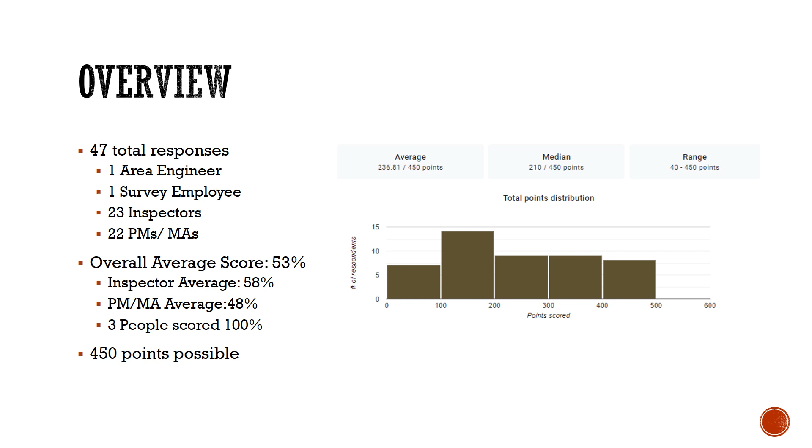The total amount of points available was 450 points. So you can see in this table over to the right that the average was 236.81 out of 450 points. The median was 210, and our range was from 40 points to 450 points. And with that, we'll jump into the first question.

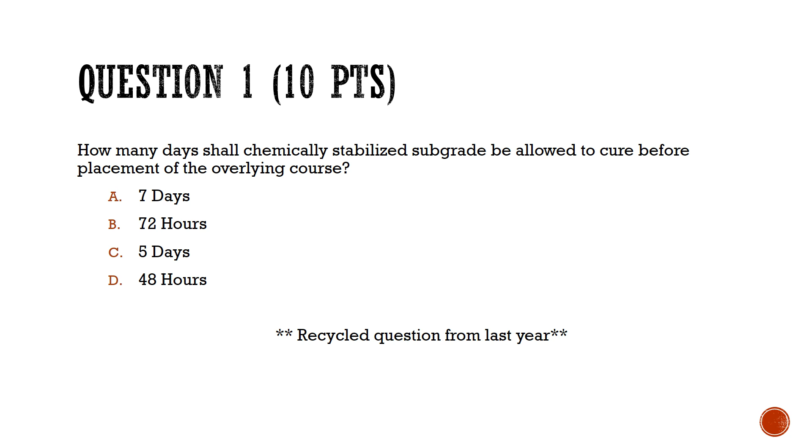Question 1 was worth 10 points. How many days shall chemically stabilized subgrade be allowed to cure before placement of the overlying course? A, 7 days. B, 72 hours. C, 5 days. Or D, 48 hours. This question was recycled from last year, so we're testing a little bit to see if you guys retained any knowledge from last year's Winter School Jeopardy.

The answer to that was C, 5 days, and that came from spec 20605D, curing and construction of chemically stabilized subgrade. You can see I highlighted from the spec, it says cure the chemically stabilized subgrade for at least 5 days before the placement of the overlying course. 27 people answered that question correctly, so that's about 57% of you.

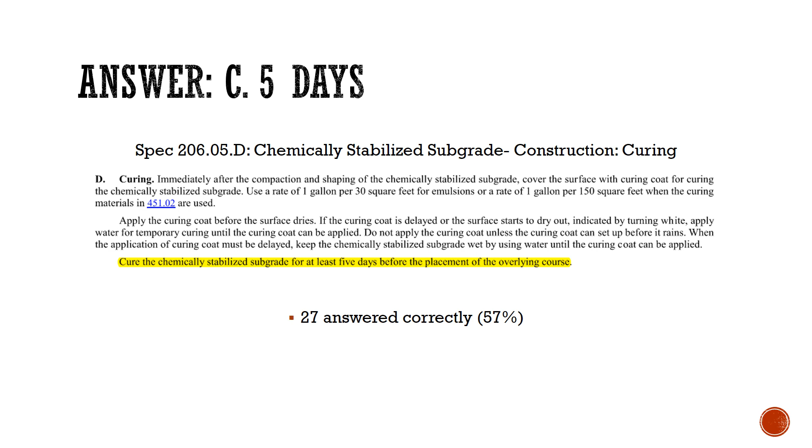Alright, question 2 was worth 20 points. At what temperature will the city measure asphalt binder by the gallon? A, 250 degrees Fahrenheit. B, 300 degrees Fahrenheit. C, 285 degrees Fahrenheit. Or D, 325 degrees Fahrenheit.

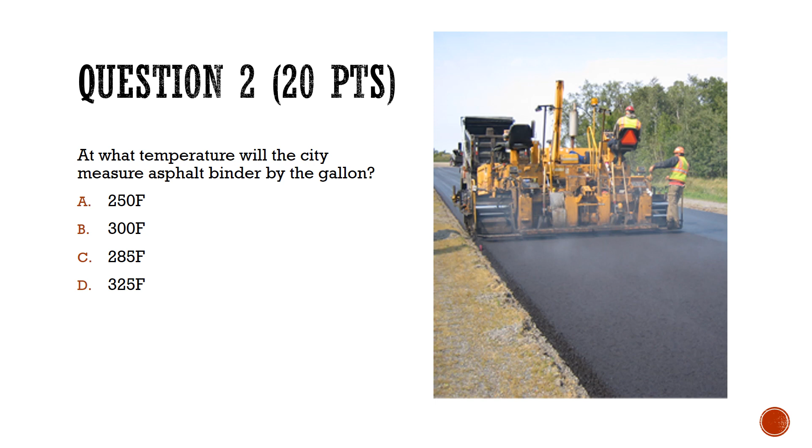The answer to that one was B, 300 degrees Fahrenheit. That answer came from spec 10901, acceptance, measurement, and payment, measurement of quantities. There is a table there in the spec, and it says the city will measure the following materials by the gallon at the following temperatures, and it shows asphalt binder at 300 degrees Fahrenheit. 22 of you answered that correctly, so about 47% got that one right.

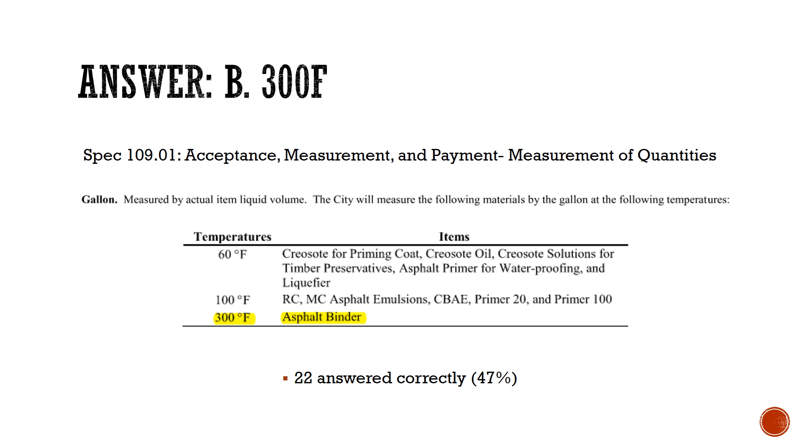Question 3 was worth 10 points. It was a fill in the blank. Embankment material, excluding rock and RPCC, shall be spread in successive horizontal loose lifts not to exceed blank inches.

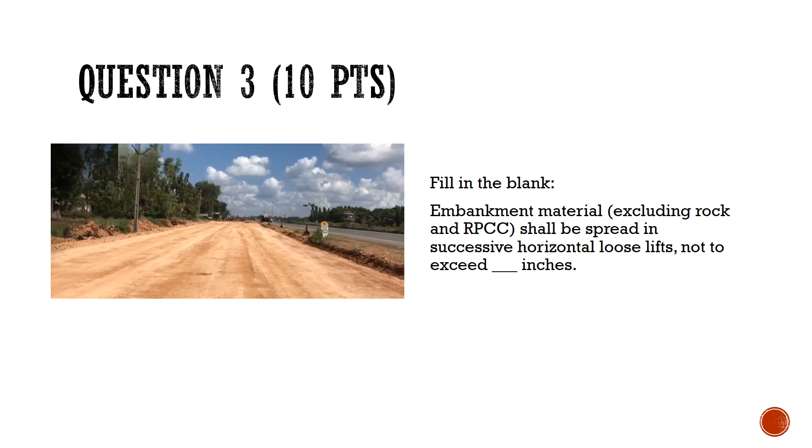The answer to that was 8 inches. That came from spec 20306, roadway excavation and embankment, spreading and compacting. You can see from the spec book right there, it says spread all embankment material except for rock in 20306C and RPCC in 20306D in successive horizontal loose lifts not to exceed 8 inches or 200 millimeters in thickness. 29 of you answered that correctly, so about 62%.

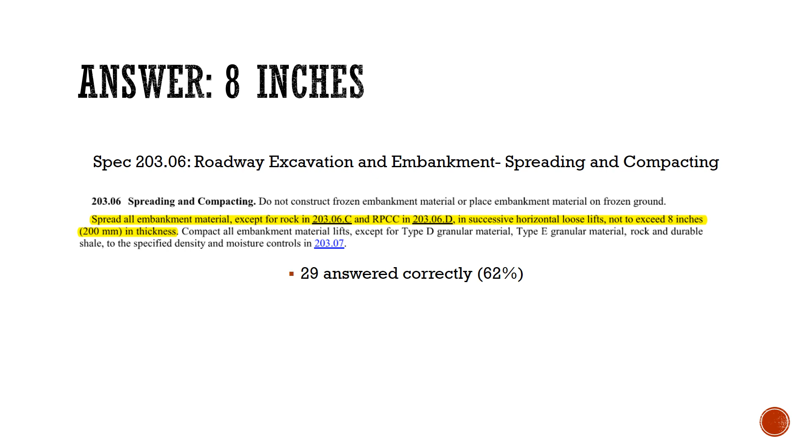Question 4 was worth 10 points. All fiber work that will disrupt system devices or infrastructure shall be limited to the blank weekend of each month, unless specifically permitted in the plans or otherwise directed by the City Fiber Construction Coordinator. A, first. B, second. C, third. Or D, fourth.

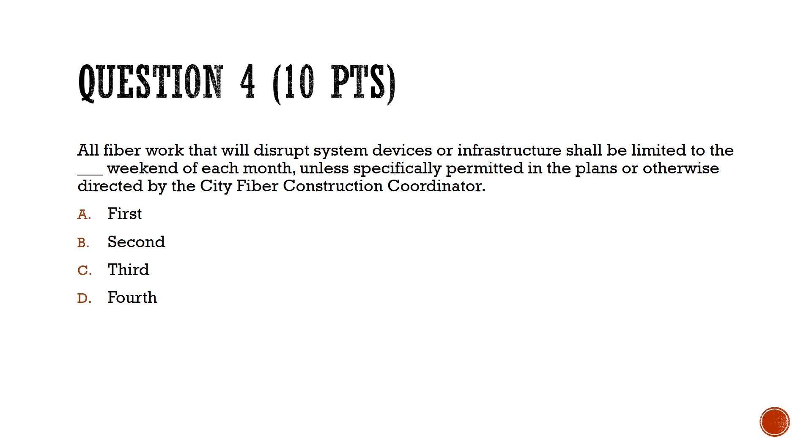The answer to that one was C, the third weekend of the month. That came from Supplemental Specification 1620, Fiber Optic Cable Material, Installation, and Testing Requirements. We pulled directly out of that supplemental spec: all work that will disrupt system devices or infrastructure shall be limited to the third weekend of each month, unless specifically permitted in the plans or otherwise directed by City Fiber Construction Coordinator. The third weekend of the month includes the hours of 9 p.m. Friday through 5 a.m. Monday. 25 of you answered that one correctly, so about 53% of the responses got that one right.

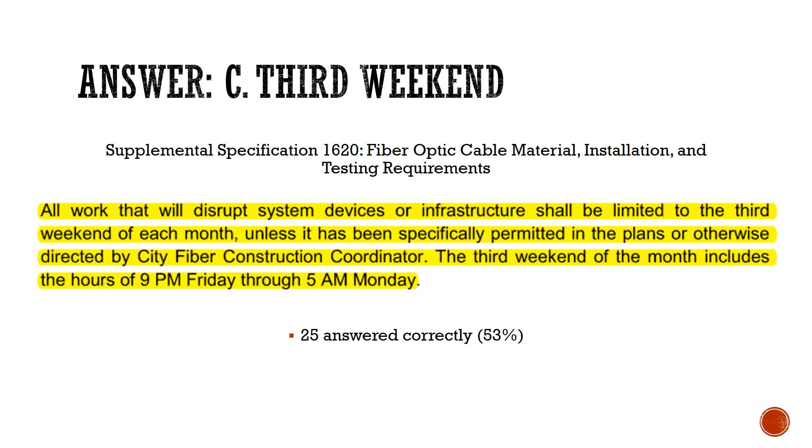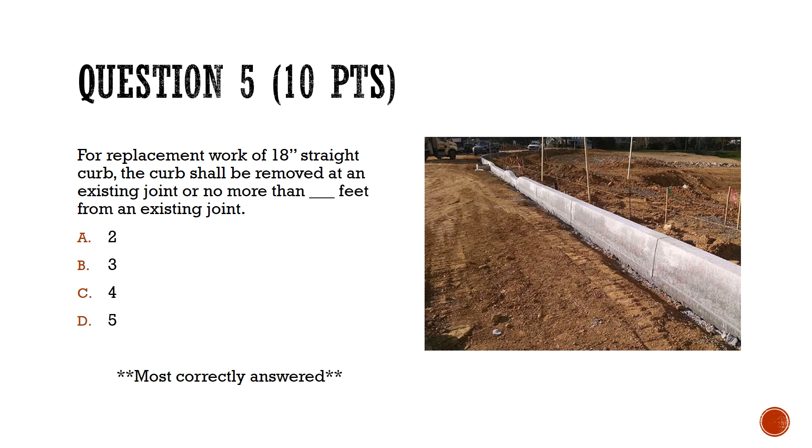The answer was D, 5 feet. That came from Standard Drawing 2000 for 18-inch straight curb. In the notes it says, for replacement work, the curb shall be removed at an existing joint or no closer than 5 feet from an existing joint. 42 of you answered that correctly, about 89%.

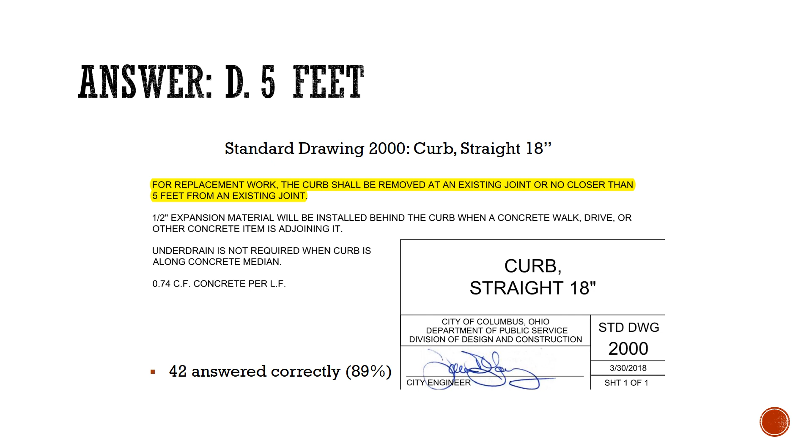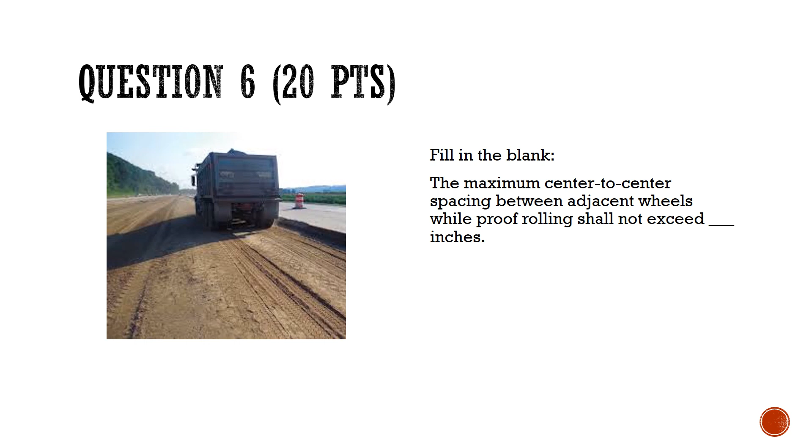Question 6 was worth 20 points. It was a fill in the blank. The maximum center-to-center spacing between adjacent wheels while proof rolling shall not exceed blank inches. The answer was 32 inches, from spec 204.06, subgrade compaction and proof rolling/test rolling. Note number 4 states a maximum center-to-center spacing between adjacent wheels not exceeding 32 inches. 28 of you answered that correctly, and that is 59%.

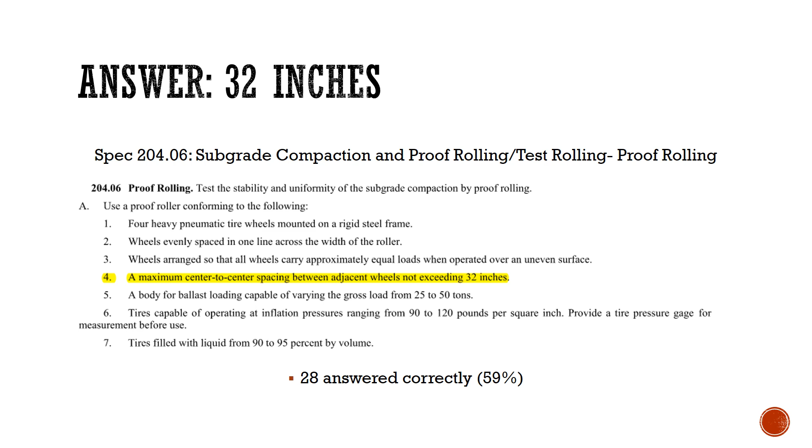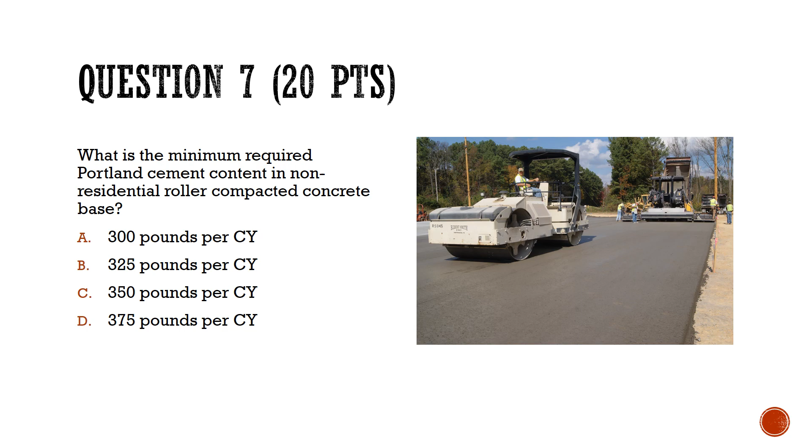The answer was C, 350 pounds per cubic yard. That came from spec 30703, roller compacted concrete base mix design. It says roller compacted concrete base, the minimum Portland cement content shall be 350 pounds per cubic yard. 30 of you answered that correctly, about 64%.

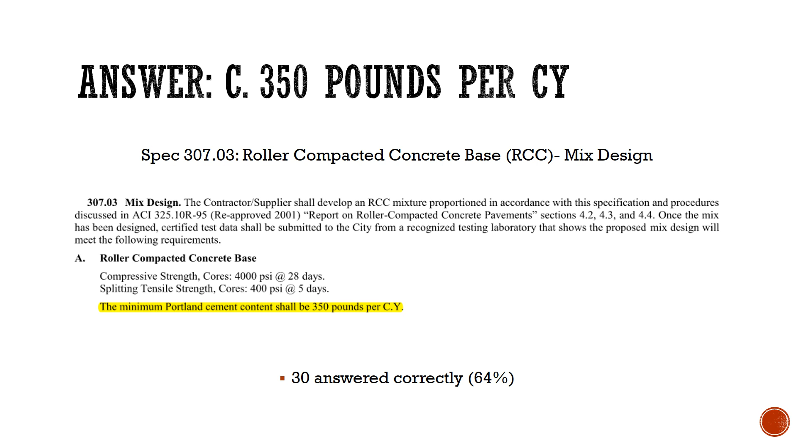Question 8 was worth 30 points. If transporting hot asphalt concrete at prevailing air temperatures below blank degrees Fahrenheit, or if the length of haul exceeds blank miles, truck beds shall be insulated to maintain workable mix temperature. A, 55 degrees Fahrenheit, 25 miles. B, 50 degrees Fahrenheit, 20 miles. C, 55 degrees Fahrenheit, 20 miles, or D, 50 degrees Fahrenheit, 25 miles.

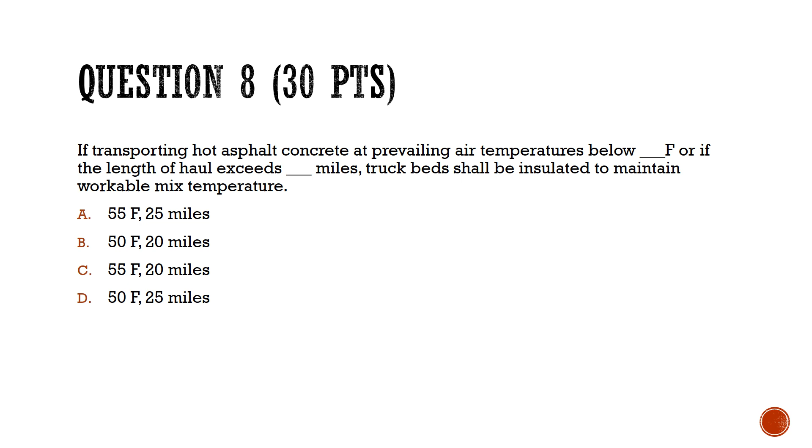The answer was B, 50 degrees Fahrenheit, 20 miles. That came from spec 401.11, asphalt concrete pavements general hauling. It states, if transporting hot asphalt concrete at prevailing air temperatures below 50 degrees Fahrenheit, or if the length of haul exceeds 20 miles, insulate all truck beds to maintain workable mix temperature and ensure that all covers are fastened to exclude the wind. 32 of you answered that correctly, about 68%.

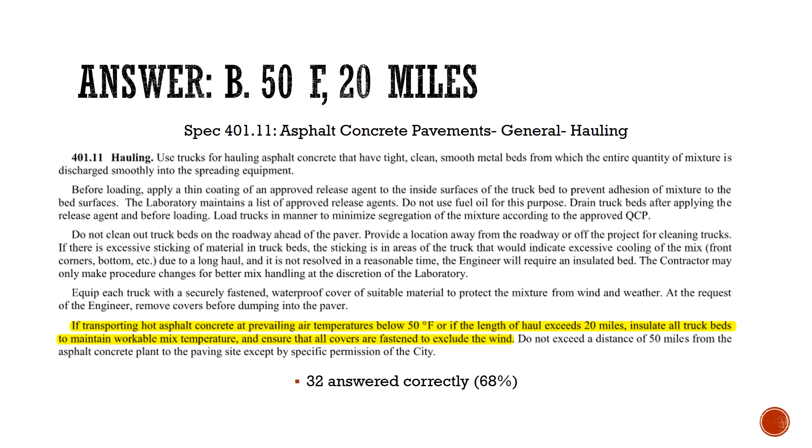Question 9 was worth 20 points. What is the diameter of a typical water curb box lid? A, 4 5/8 inches. B, 4 3/4 inches. C, 4 7/8 inches. Or D, 5 inches.

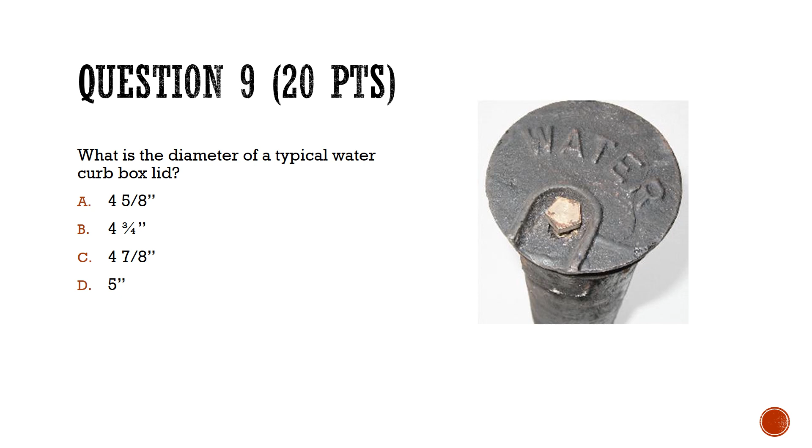The answer was C, 4 7/8 inches. That came from the Water Standard Drawing L1001, which shows that the diameter of the lid would be 4 7/8 inches. 22 of you answered that correctly, so only about 47%.

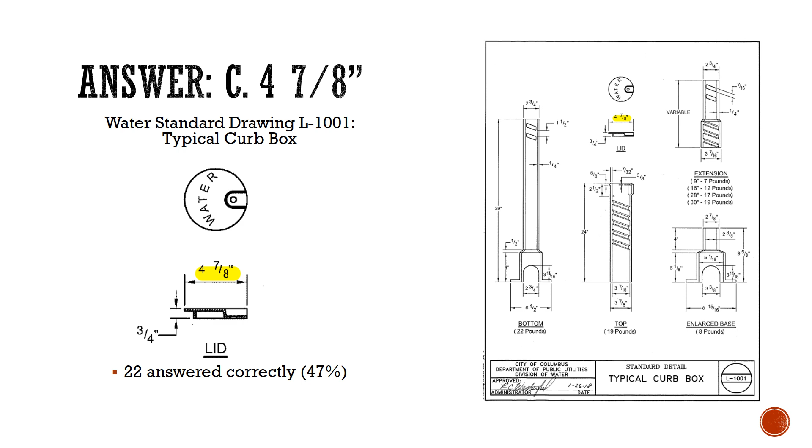Question 10 was worth 30 points. The allowable leakage during a pressure test of 800 feet of 24-inch water line is A, 1.59 gallons per hour, B, 1.99 gallons per hour, C, 1.16 gallons per hour, or D, 1.49 gallons per hour.

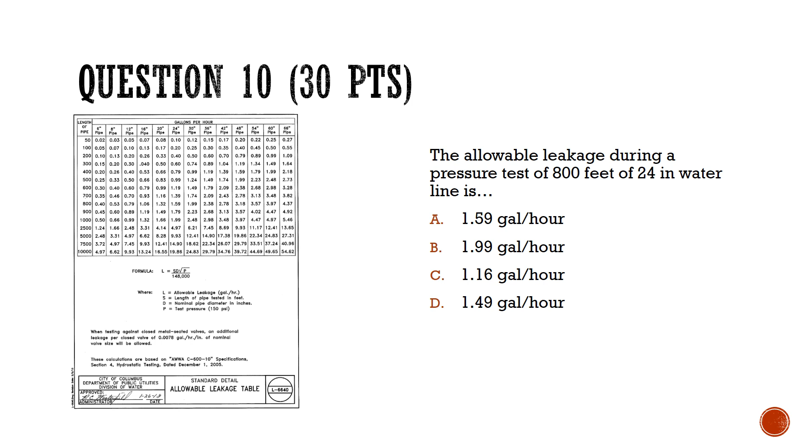The answer is A, 1.59 gallons per hour. To get that answer, you can either use the formula on Standard Drawing L6640, or you could have used the table as highlighted there. 21 of you answered that correctly, so only 45%.

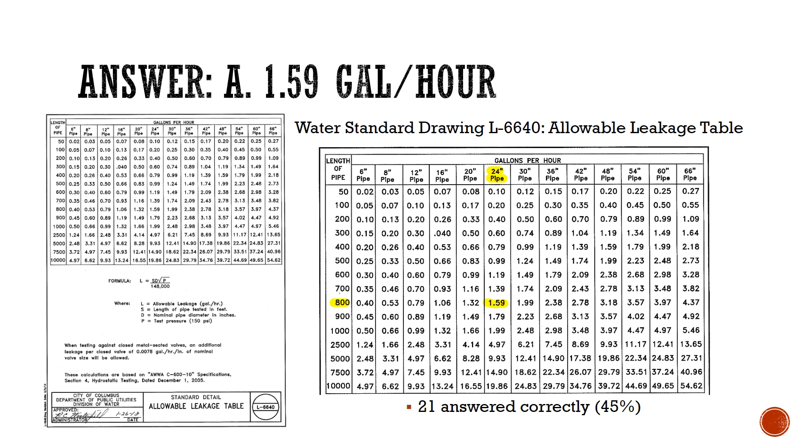Question 11 was worth 10 points. Fill in the blank. The center of streetlight foundations shall be located blank feet off the back of curb unless otherwise specified.

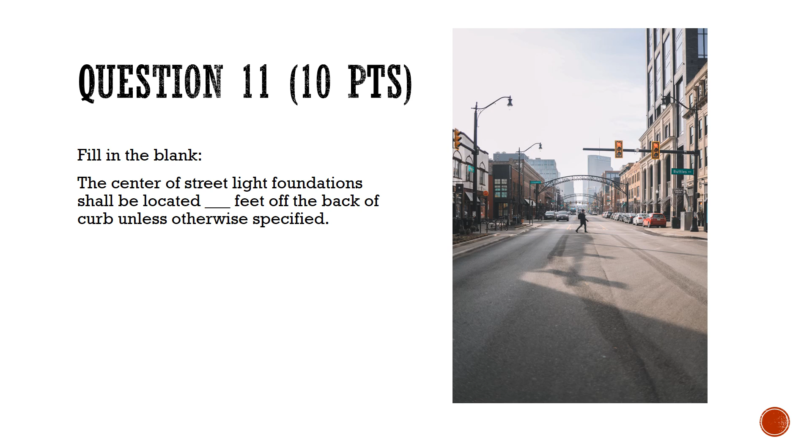The answer was 3 feet. You can find that answer in either MIS 200, 201, 202, or 203, all of the streetlight foundation drawings. In that picture, they show the back of curb and the center of the foundation to be 3 feet, or as specified. 26 people answered that correctly, about 55%.

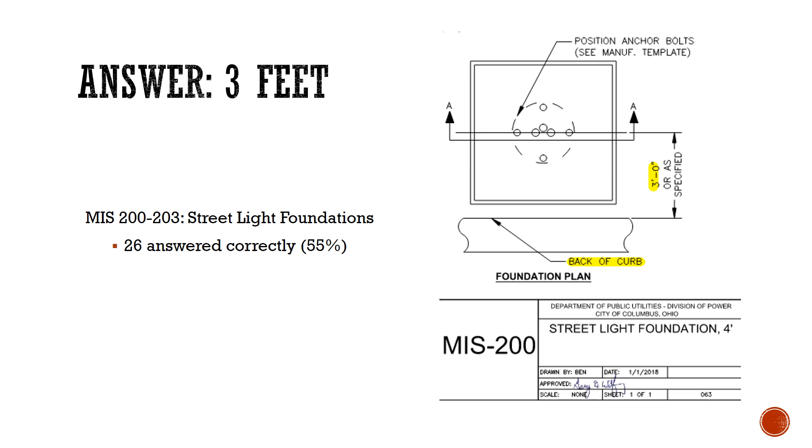Question 12 was worth 10 points. The pole service opening on downtown light poles shall be located on the blank of the pole. A, curb/street side, B, north side, C, building/sidewalk side, or D, south side.

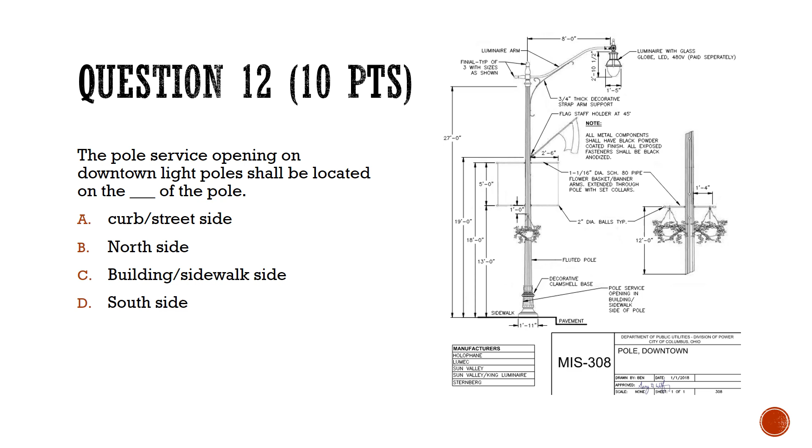The answer was C, the building/sidewalk side. You could get the answer from MIS 308, the drawing for the downtown streetlight poles. 38 people answered that correctly, for about 81%. That was one of the top correctly answered questions.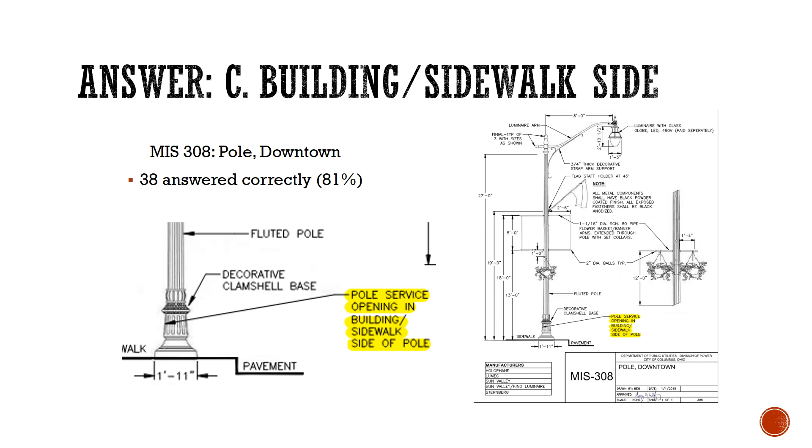Question 13 was worth 30 points, and this was one of the 2 most missed questions. This was a fill in the blank. 32-inch concrete traffic pull boxes shall have an outer diameter of blank inches.

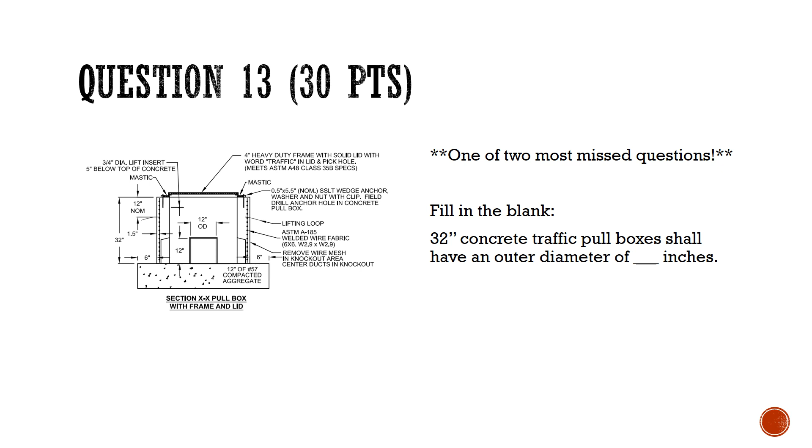The answer to that one was 44 inches, from standard drawing 4022. You can see over to the left, that picture pulled from the standard drawing calls out that the entire outer diameter of the concrete pull box should be 44 inches. This was one of the 2 most incorrectly answered questions, only 15 people answered this one correctly, so about 32% of you got this one right.

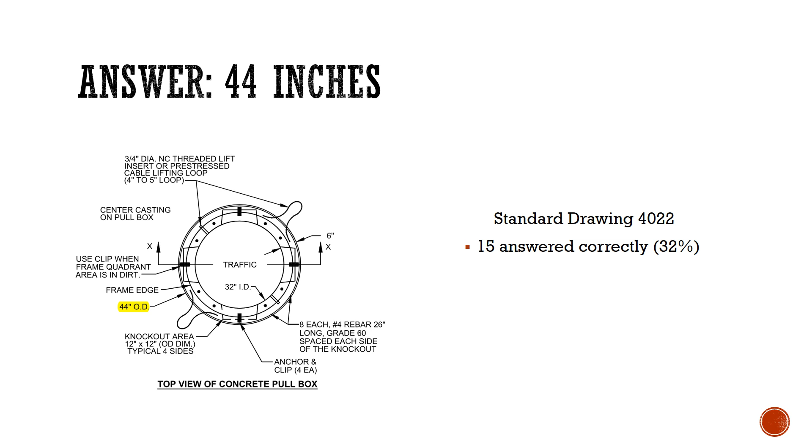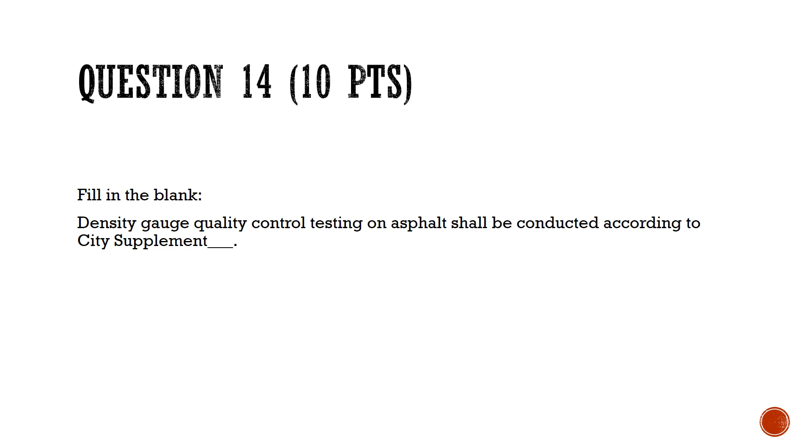Question 14 was worth 10 points. Fill in the blank: Density gauge quality control testing on asphalt shall be conducted according to city supplement blank. The answer was 1055, City Supplement 1055, asphalt mat density by gauge testing, general. This supplement defines equipment, procedures, and reporting methods for asphalt mat density testing and acceptance. 21 people answered that correctly, for about 45%.

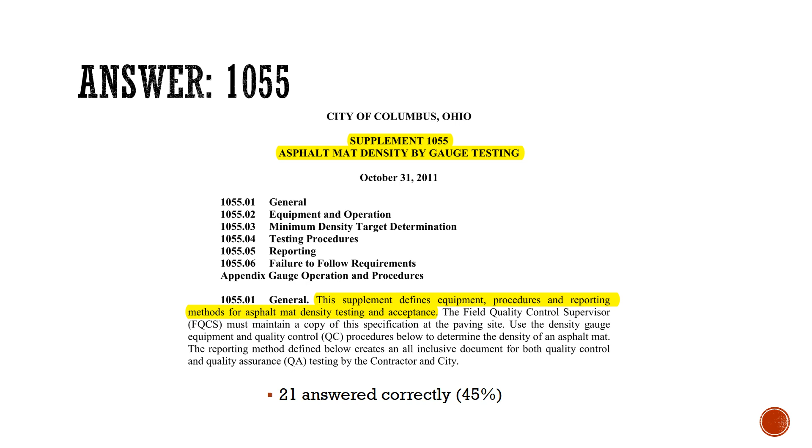Question 15 was worth 30 points. When compiling red line drawings for chlorination requests, line work that is changed more than blank inches horizontally, plan, or blank inches vertically, profile, shall be redrawn. A, 12 and 12, B, 18 and 12, C, 12 and 24, or D, 24 and 18.

The answer to that one was B, 18 and 12. That answer is found on the chlorination request checklist on DPU's webpage. You can see there for the requirements for the as-built plans to be submitted, they would like for you to redraw line work that is changed by more than 18 inches horizontally or 12 inches vertically. Only 17 people answered that correctly, about 36% of the responses.

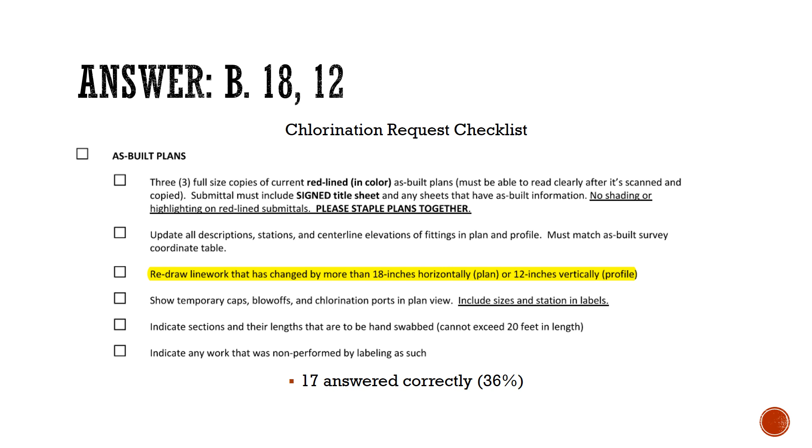Question 16 was worth 20 points. When applying thermoplastic pavement markings to pavements older than 6 months, the pavement surface and the ambient air temperature shall be no less than blank degrees Fahrenheit and rising. A, 32 degrees Fahrenheit, B, 40 degrees Fahrenheit, C, 60 degrees Fahrenheit, D, 65 degrees Fahrenheit.

This question was recycled from last year. The answer was C, 60 degrees Fahrenheit, from spec 644.04, thermoplastic pavement marking application. It says, if applying thermoplastic to pavements older than 6 months, ensure that both the pavement surface and the ambient air temperature at the time of application are not less than 60 degrees Fahrenheit and rising. 29 responses got that correctly, for about 62%.

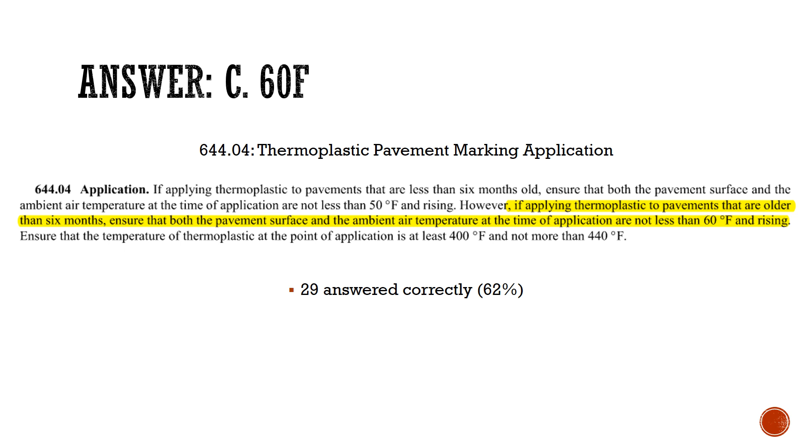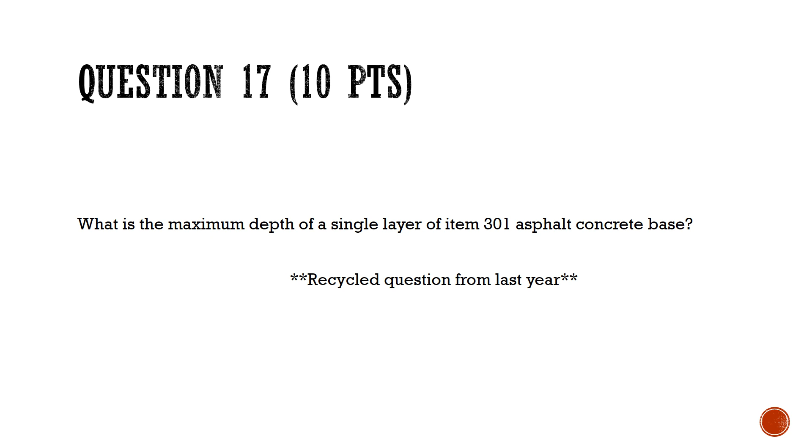Question 17 was worth 10 points. What is the maximum depth of a single layer of item 301 asphalt concrete base? This question was also recycled from last year. The answer was 6 inches, from spec 301.04, asphalt concrete base, spreading and finishing.

You can see there that the first sentence says, ensure that the maximum compacted depth of any one layer is 6 inches. 37 people answered that one correctly, so about 79% of the responses got that one right.

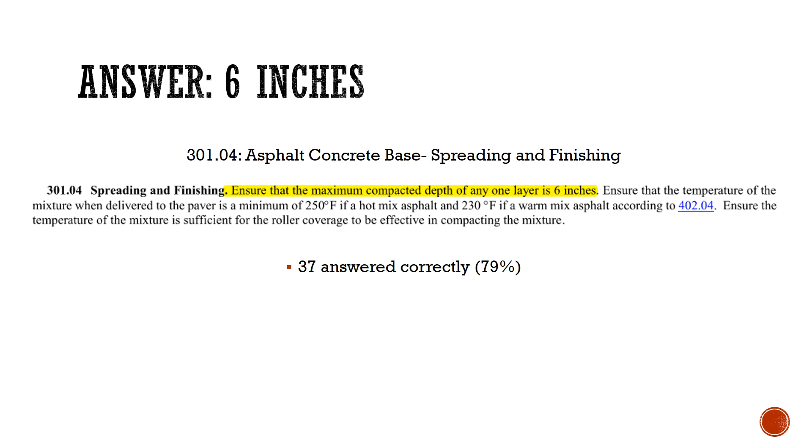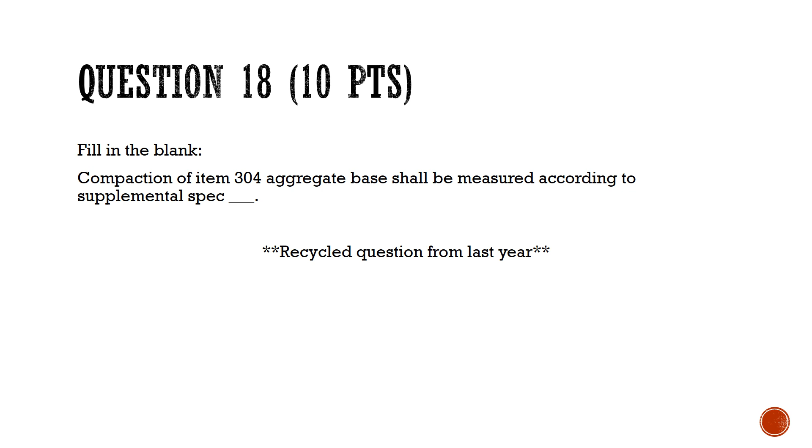Question 18 was worth 10 points. It was a fill in the blank: Compaction of item 304 aggregate base shall be measured according to supplemental spec blank. This question was also recycled from last year. The answer was supplemental spec 1501. You can find that answer through spec 30405, aggregate base compaction. It says there, the city will measure compaction according to supplemental specification 1501. 34 people answered that correctly, so about 72% got that one right.

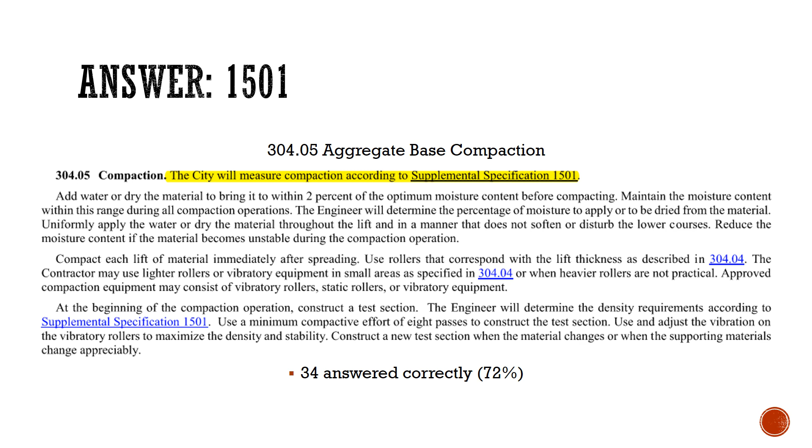Question 19 was worth 30 points, and it was a fill in the blank. When relocating an existing fire hydrant, a second watch valve should be installed within 2 feet of the relocated hydrant if the new hydrant lead exceeds blank feet in length.

The answer to that is 15 feet, from spec 80906, fire hydrant relocation. It says there, if the new hydrant lead exceeds 15 feet in length, install a second watch valve and restrain within 2 feet of the relocated hydrant. 28 people answered that one correctly, about 60%.

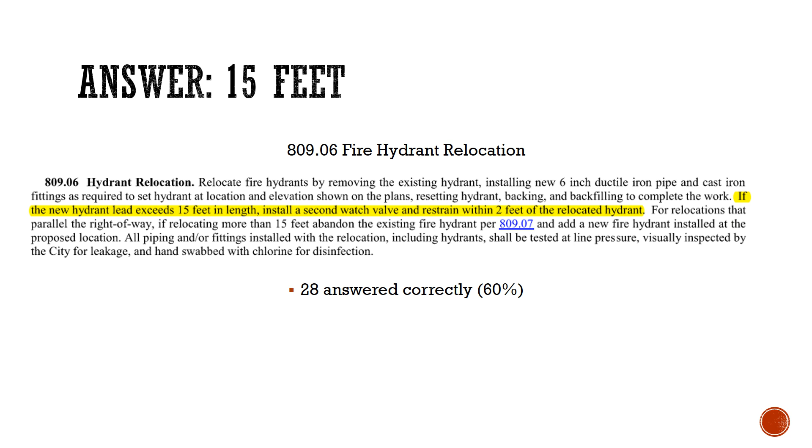Question 20 was worth 30 points, and this was the second of the 2 most missed questions. What test is conducted on pile driving operations to configure driving capacities? This question was also recycled from last year.

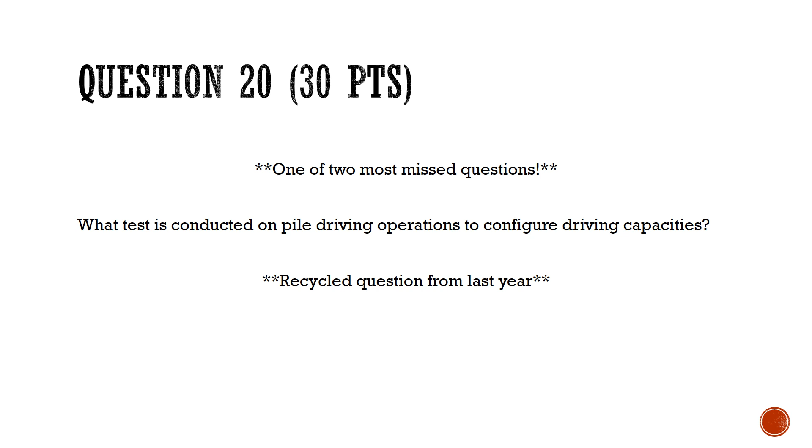The answer to this one was the dynamic load test, from spec 52302, dynamic load test. It says, this work consists of establishing driving criteria for all the piles of a specified shape, cross-section, and ultimate bearing capacity, or as specified on the plans, to be installed in the structure. 15 people answered this correctly, so about 32%.

A popular answer for this one was the static load test, and that is obviously incorrect. The static load test is from spec 506, and that one is used to determine the ultimate bearing value of the pile. So that's not used to establish the driving criteria.

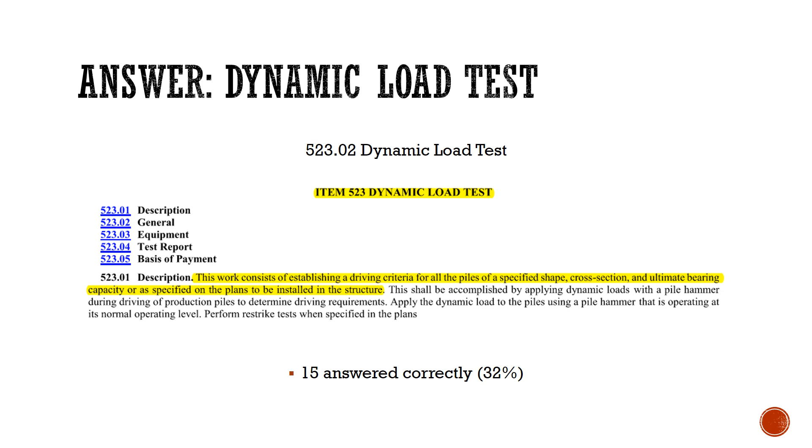Question 21 was worth 10 points. In the event that work requires a shutoff of any public or private utilities, the contractor must notify the affected subscribers at least blank hours prior to the shutoff, unless otherwise directed by the engineer. A, 24, B, 36, C, 48, or D, 60?

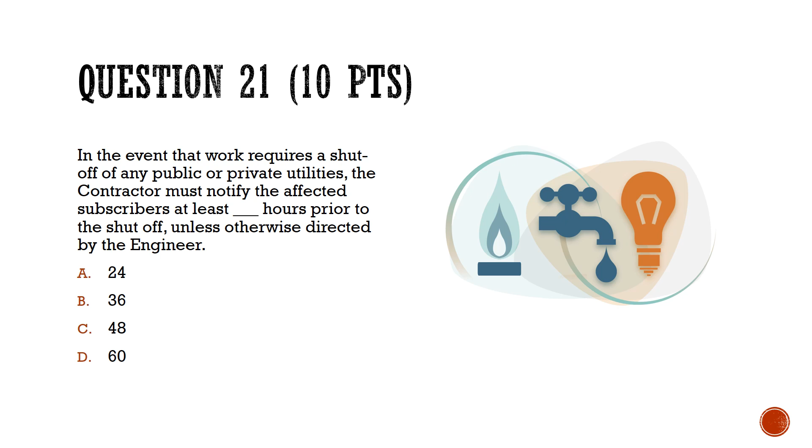And the answer to that was C, 48 hours. That came from the spec book, spec 10507F, control of work, cooperation with utilities, utility shutoff. You can see there it says the contractor shall make such notification at least 48 hours prior to such shutoff unless otherwise directed by the engineer. 30 people answered that one correctly, so about 64%.

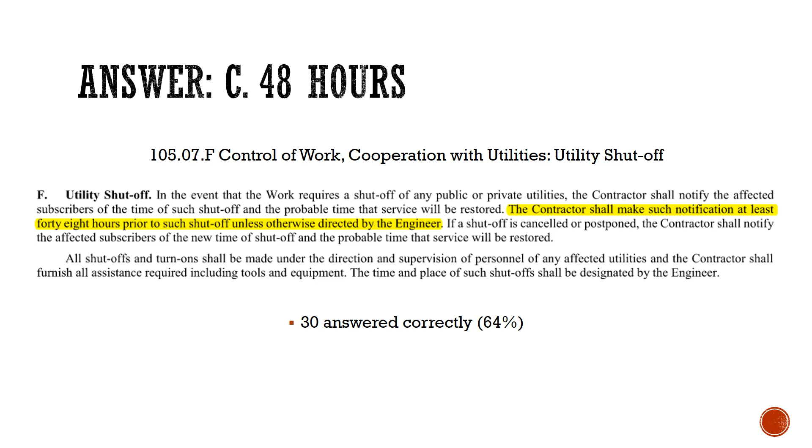Question 22 was worth 20 points. For topsoil to be considered loamy, ensure that the fraction passing the number 10 sieve does not contain more than blank percent clay. A, 35, B, 40, C, 45, or D, 50?

And the answer to that was B, 40%. That came from spec 653.02, topsoil furnished and placed materials. You can see right there it says for topsoil to be considered loamy, ensure that the fraction passing the number 10 sieve does not contain more than 40% clay. 28 people answered that correctly, so about 60%.

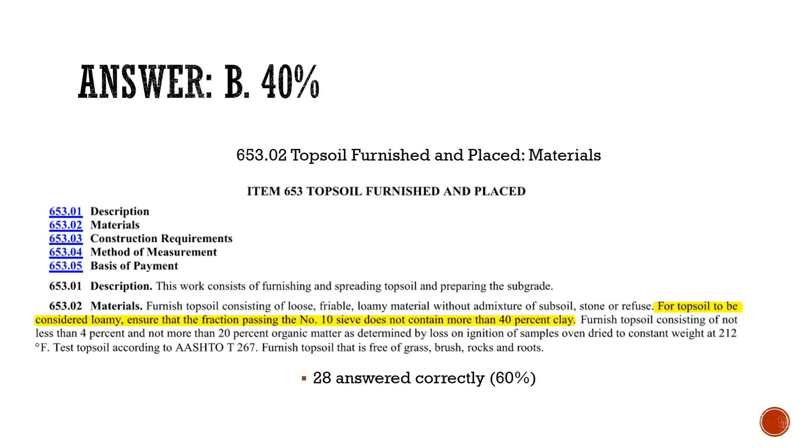All right, question 23 was worth 20 points. It was a fill in the blank. Span wire clamps shall be made of blank, capable of resisting a load of 12,500 pounds minimum without permanent distortion.

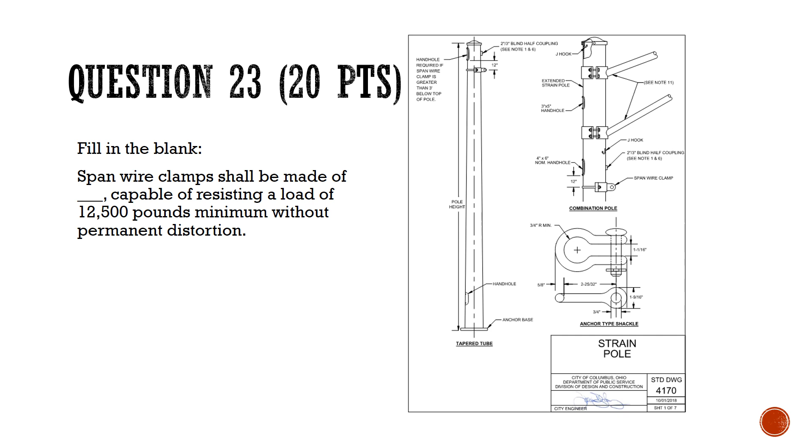And the answer to that was galvanized steel. That came from standard drawing 4170 for strain poles, note number 2. It says right there, span wire clamp shall be galvanized steel capable of resisting a load of 12,500 pounds minimum without permanent distortion. Only 16 people answered this one correctly, so about 34%. This was one of the second most missed questions. Most people just answered steel, or we had a few stainless steel answers, but we were looking for galvanized steel. So if you didn't get galvanized, you didn't get points for this one.

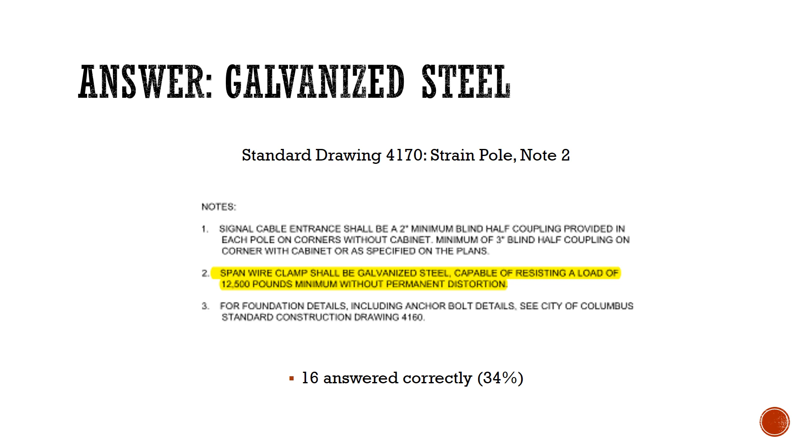Question 24 was worth 20 points. What does CTSS stand for?

All right, the answer to that one was Columbus Traffic Signal System. I pulled that from the supplement 1620. I'm sure you can find it in many other places, but that would be a question for probably Ray or Nick, not me. But you can see there they have written out Columbus Traffic Signal System, parentheses, CTSS. 27 people answered that one correctly for about 57%. And those of you that missed that one had some pretty interesting answers that gave me a good chuckle. So I appreciate your effort in trying to figure out what CTSS could stand for.

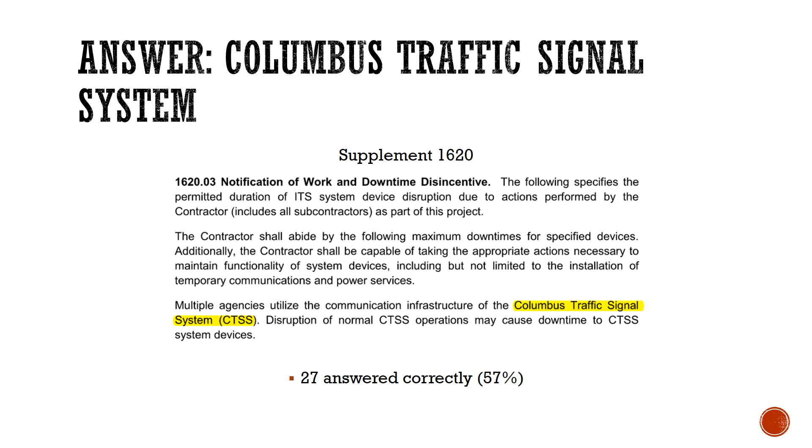All right, question 25. This is the last question. It was worth 10 points. The fiber optic cable identification tag for City of Columbus Department of Technology, Franklin County Engineers Office, and ODOT are all black text on blank. A, pink, B, yellow, C, blue, or D, white.

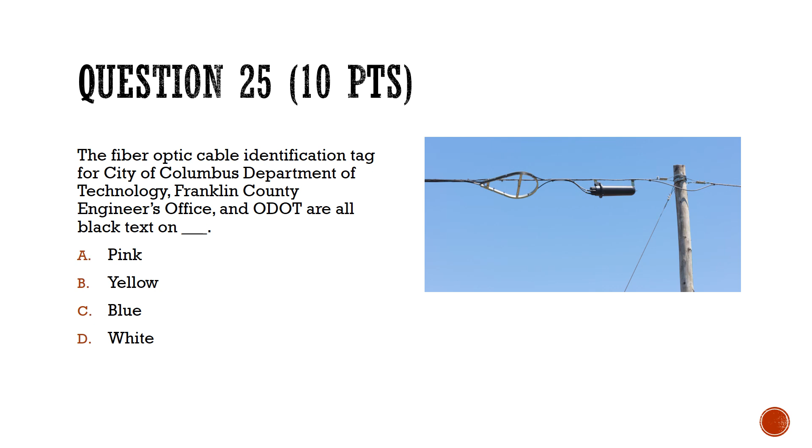And the answer to that one was B, yellow. That came from supplement 1620 10A cable identification wraps. You can see there is a table in that supplemental spec that kind of writes out that the City of Columbus Department of Technology, Franklin County Engineers Office, and ODOT will all be black text on a yellow wrap.

16 of you answered that one correctly, so 34%. This was one of the other second most missed questions. Most of you put pink. That's kind of what we talked about last year in winter school. The question that we had about cable identification tags was for the City of Columbus traffic. Those ones are black text on a pink wrap. So switched it up on you guys, and I tripped most of you up. So good job remembering that we talked about pink last year, but that's not the answer this year.